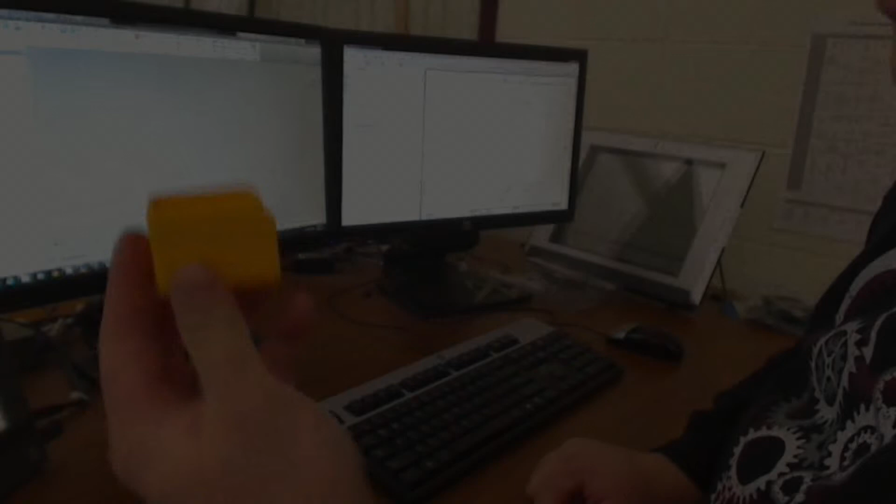The next part is what I'll call the dump bucket, like the back dump truck type bucket. It's going to be a shelled component with walls, and it's got fillets on it. It's got those pegs on the bottom as well.

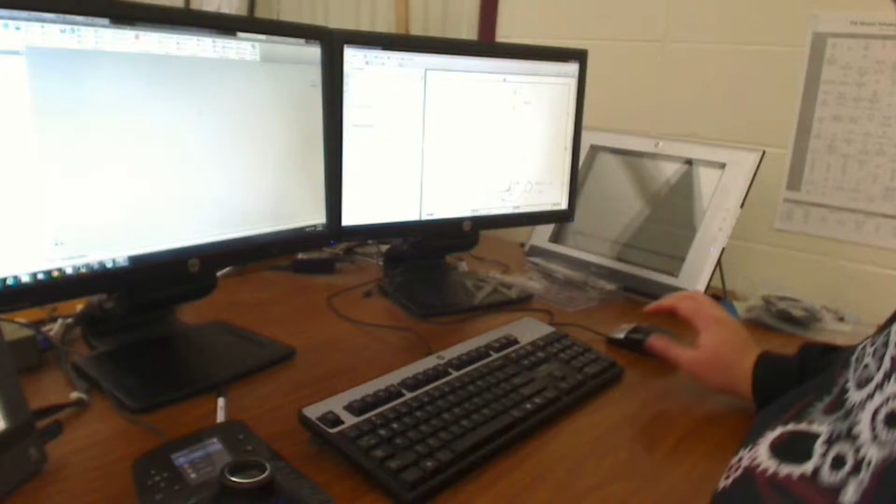So in a new part, I'll start with a block that will represent the basic shape of it. So I'll start creating a 2D sketch. Similar as before, I'm going to constrain it to the center of the line for the origin. So I'll first draw the overall shape, which is 1.84 and 1.63.

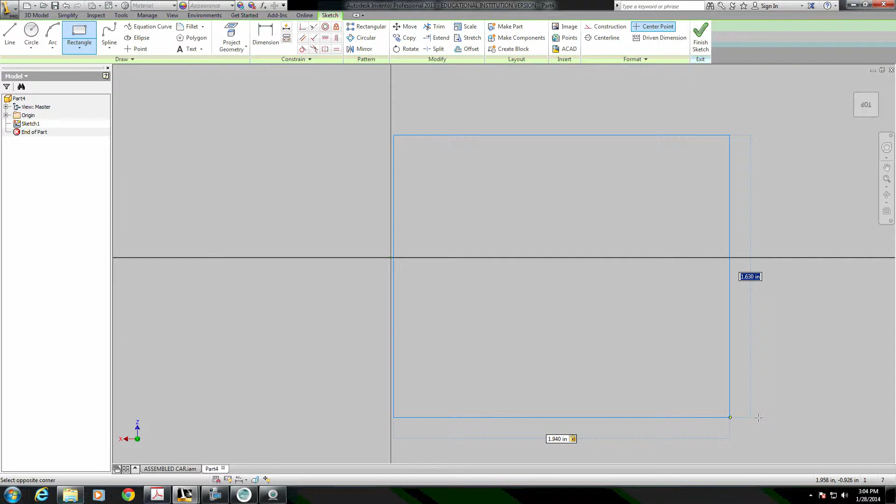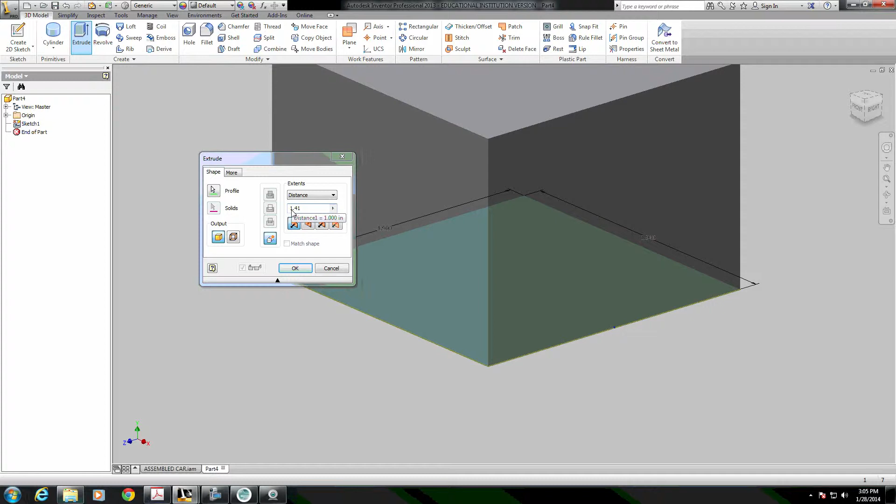I will coincident constrain center line there to the middle, and extrude it up to a height of 1.41. Then I'll add some fillets I need before I use the shell tool.

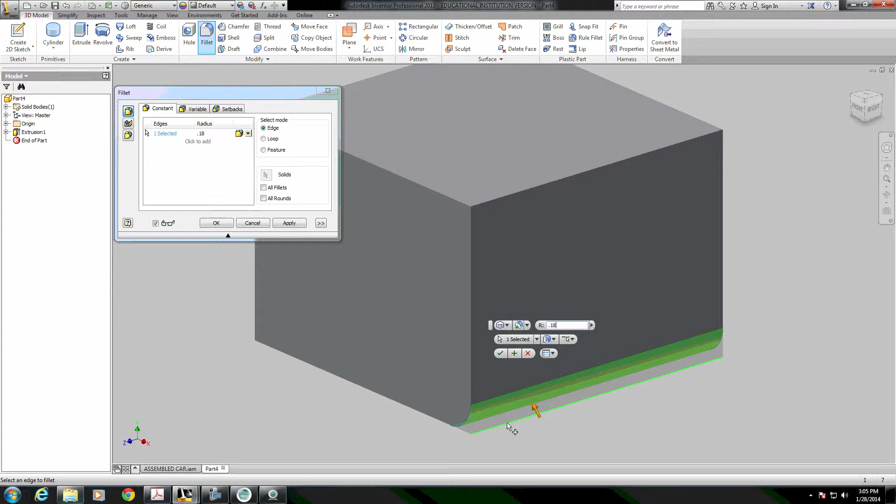A fillet on what is the lower edge of the front of 0.18, and also the sides here and the bottom corners here. Then I'll use the shell tool, removing the top. A thickness of 0.1 in is correct.

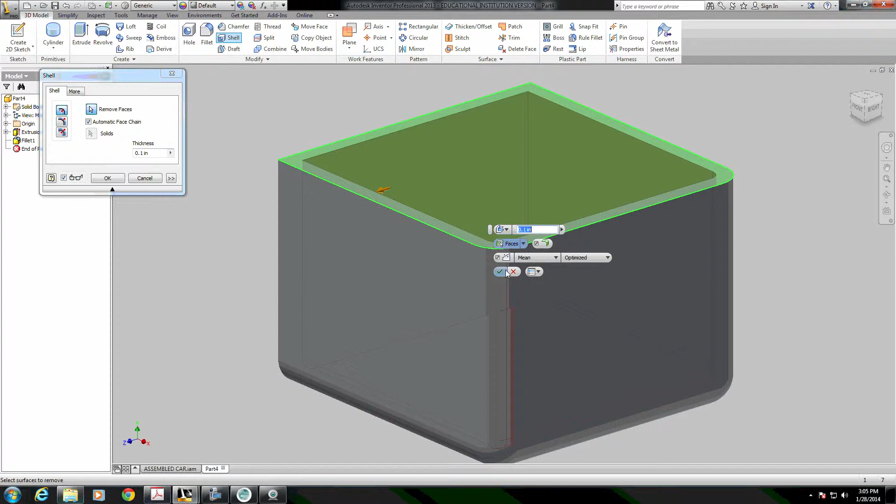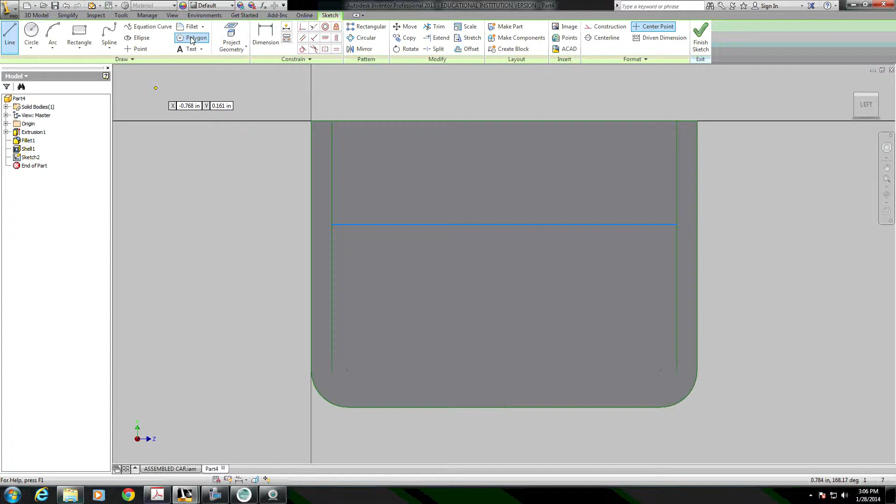Then I have to cut off a portion of the back here. So to do that, I'll create a sketch back here. I'll project the geometry of those inside lines, represent the thickness of the wall. I need just one line across here, which I can dimension as being measured 0.785 from the bottom.

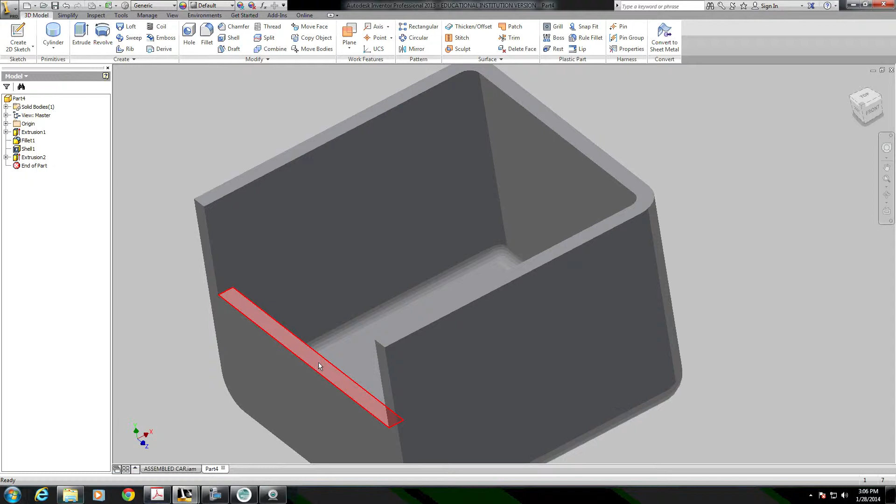And now I can extrude just this section with a cut to the next piece it finds, which is just through the first wall. And I have that cut out. The back edges of the bucket have a round over to them of 0.385, so I'll fillet both of those.

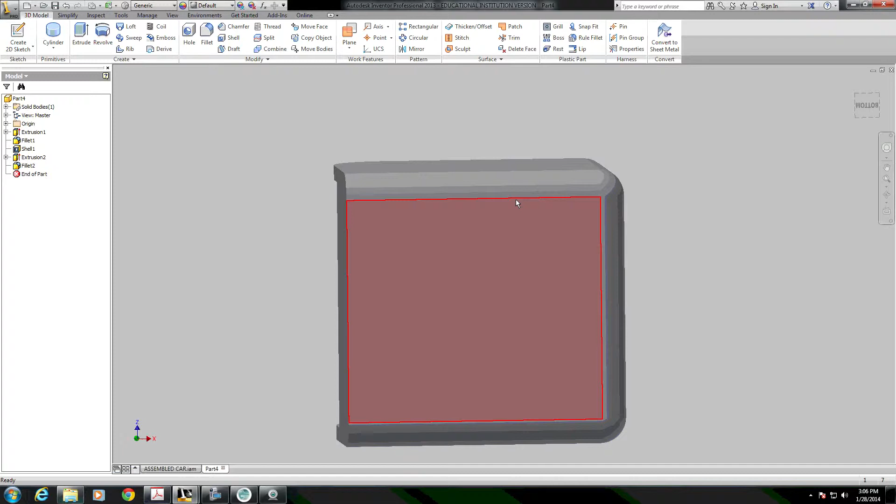Then I need to add the posts on the bottom. So I'll create a new sketch on the bottom. The posts have some detail to them. They are circles, circular pegs with little nubs along the side for the interference press fit to keep it together.

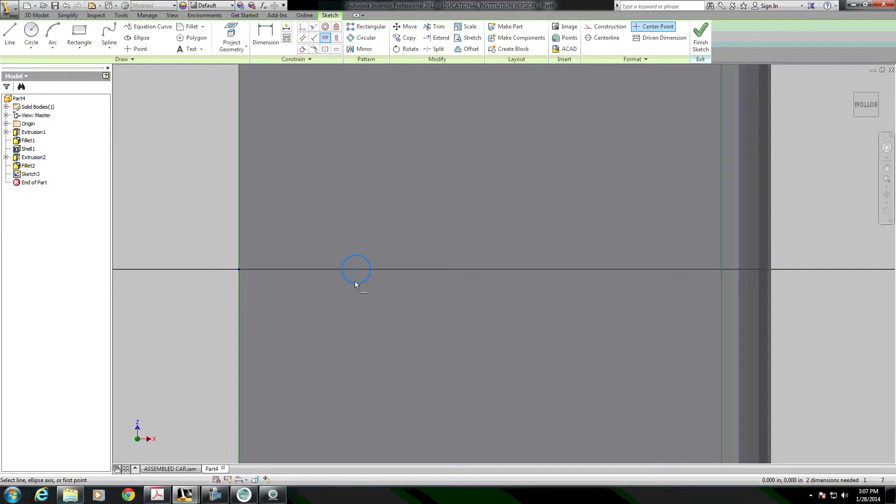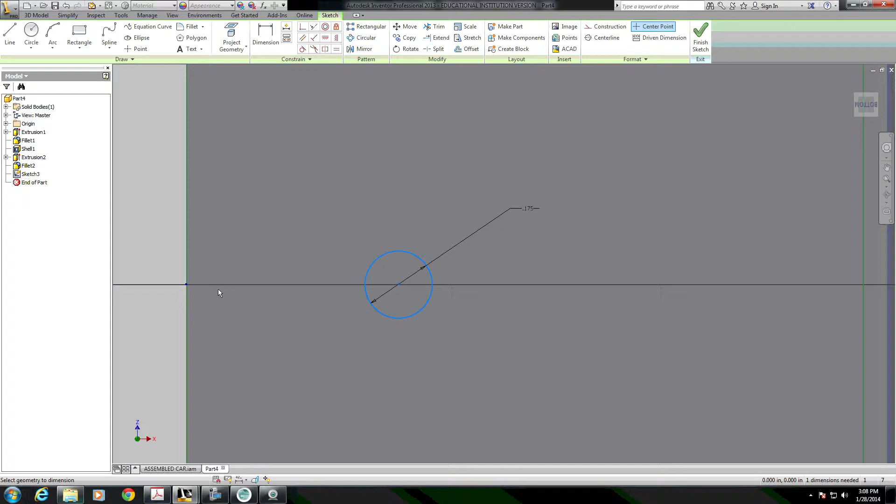So I'll start with a circle, and I'll horizontally constrain it so that it's aligned in the middle. Then I'll dimension that as being 0.175. The distance from the end I measured at being 0.478.

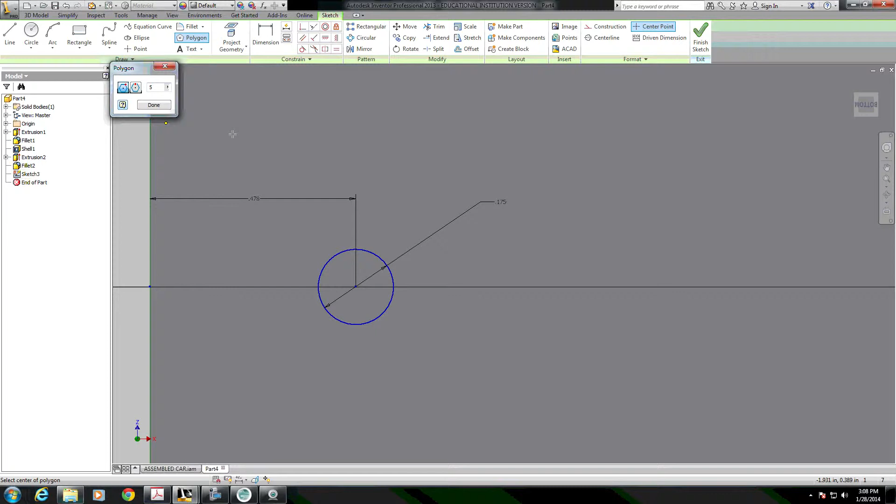And then there are 5 little nubs that stick out around the perimeter of the peg. So I will place those at the points of a pentagon. So I'm going to use the polygon tool. I'm going to do a 5-sided polygon that's inscribed because I want it to touch the edges of the circle. And I want to make it as construction lines. So I'll choose the center of my circle, and then I'll choose the tip here.

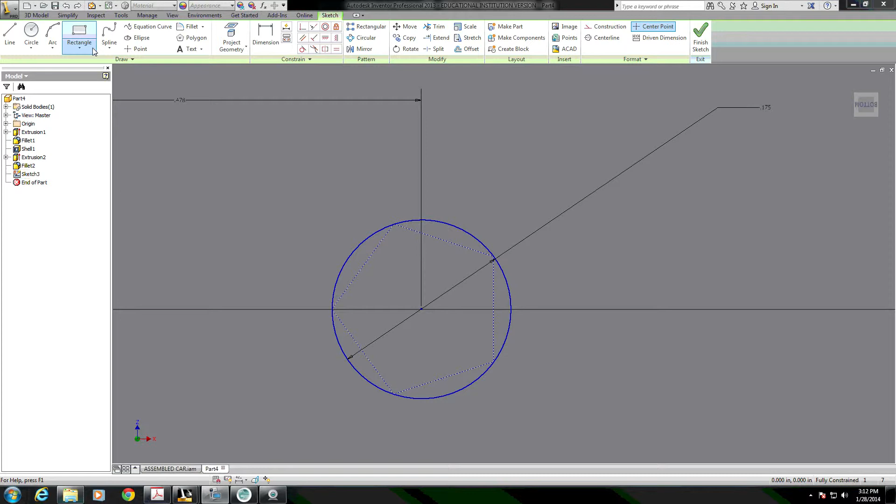I will make sure that stays constrained by using a horizontal constraint on the tip to the origin. I'm going to place circles at 0.03 at each of the vertices.

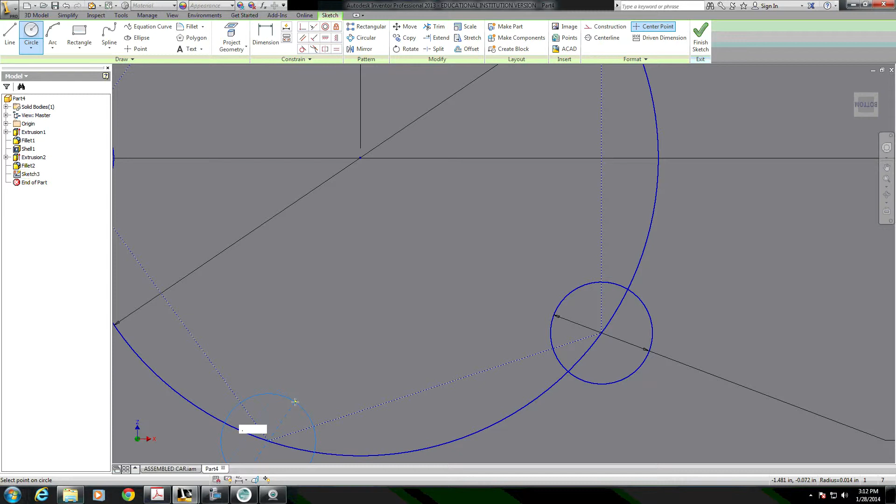Now one last, go back and add sketch. One last thing before I finish the sketch is I'm going to place a point for where the other peg is. However, I'm not going to redo all of the geometry because I don't need to. I'm simply going to use a pattern later on.

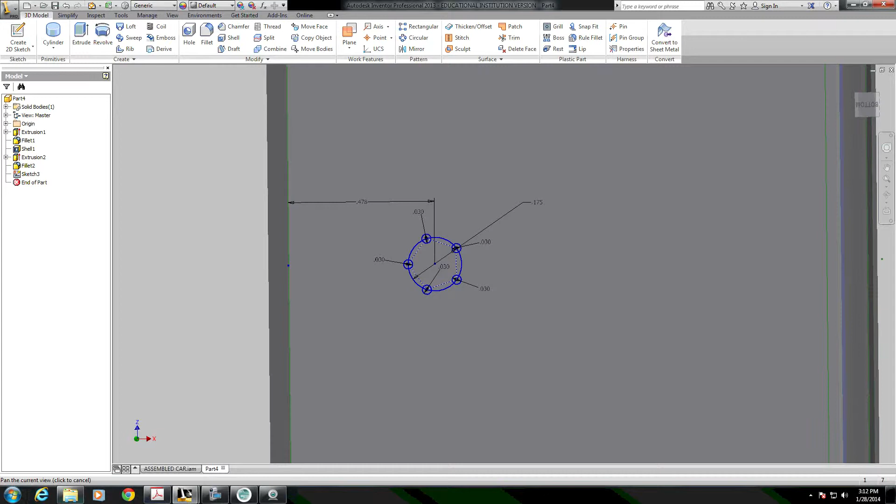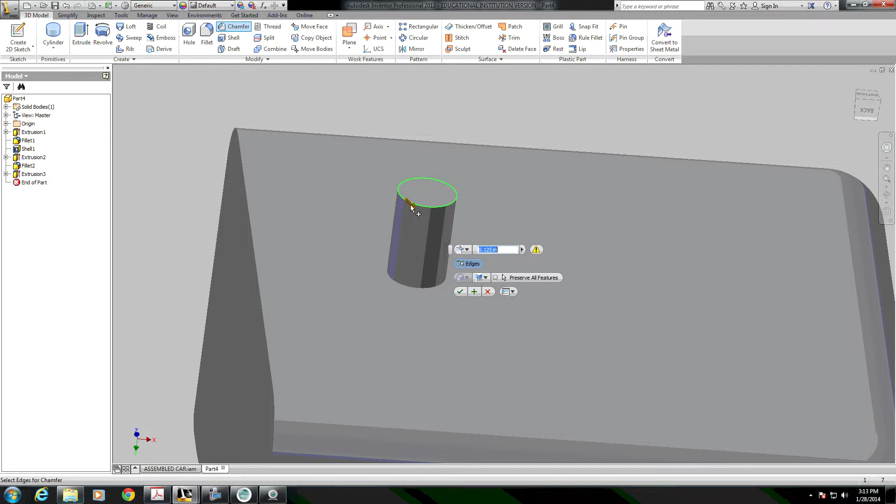Now I'm going to extrude that. I'll have to do it in a couple of different extrusions. So I'll start with an extrusion of just a center point, and that's going to go up a distance of 0.275. There is going to be a chamfer on that edge. I'm going to chamfer that edge at 0.04.

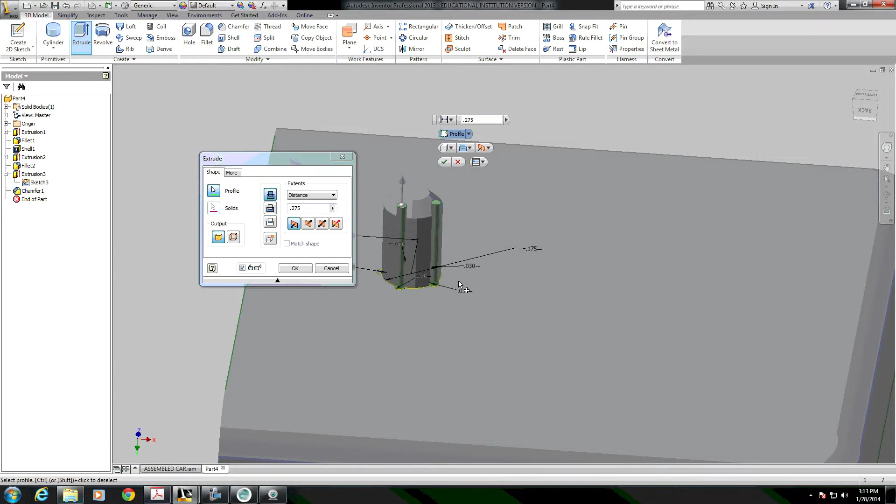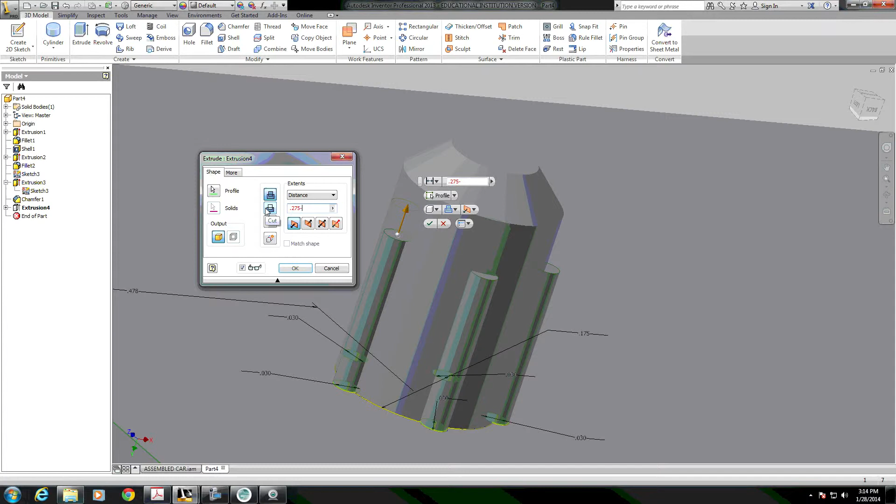And then I'm going to go back to that extrusion, make that sketch visible, and make another extrusion, this time with the nubs for the peg. Select all 5 of those. Those I only want them to go up the height of the non-chamfered part of the peg. And that distance would be the 0.275 minus the chamfer of 0.04. That's my peg. I can hide that sketch.

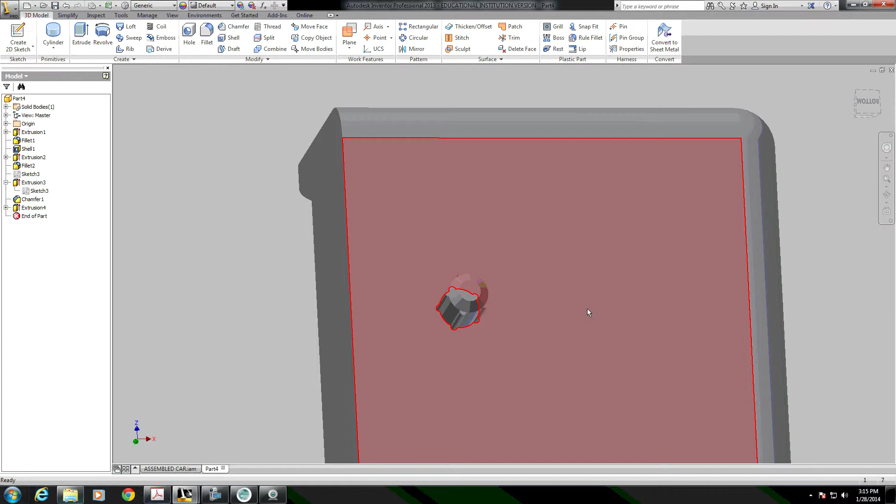Now I need 2 pegs. But instead of remodeling and re-extruding a second one, I can simply use this one and duplicate it. It actually is duplicated in the same orientation, just 1 inch over, because that's how far the holes are apart on the model. So I'll use this rectangular pattern tool for that. I'll choose these features, which is actually 3 features. The first extrusion, chamfer, and the second extrusion.

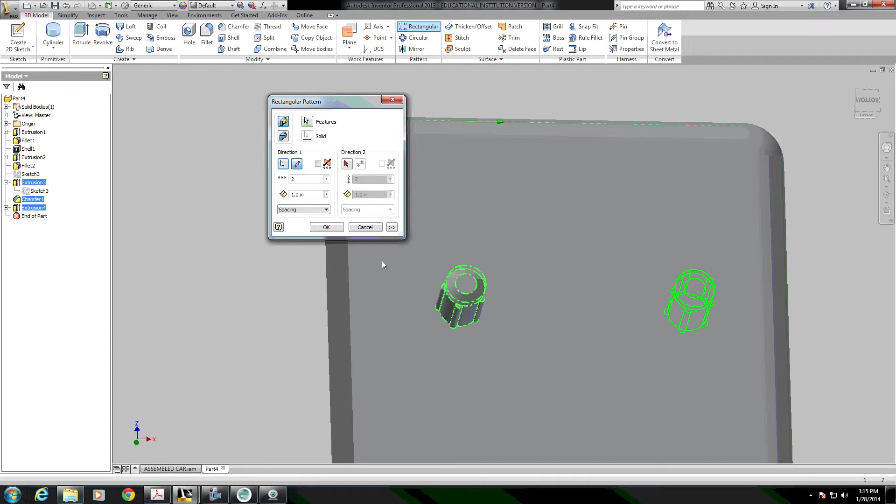The direction, I want to go along the length here, so I'll click just an edge. It's going that way, so I'll flip it to go the other direction. I only want 2 of them 1 inch apart. I press OK. And now I have both of my pegs modeled. The entire part is modeled. To finish it up, I'll choose an appropriate material color. And save it.

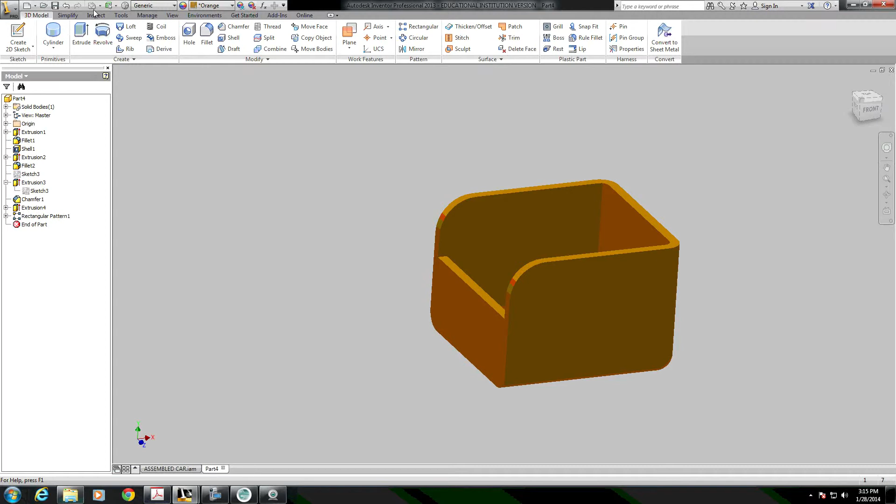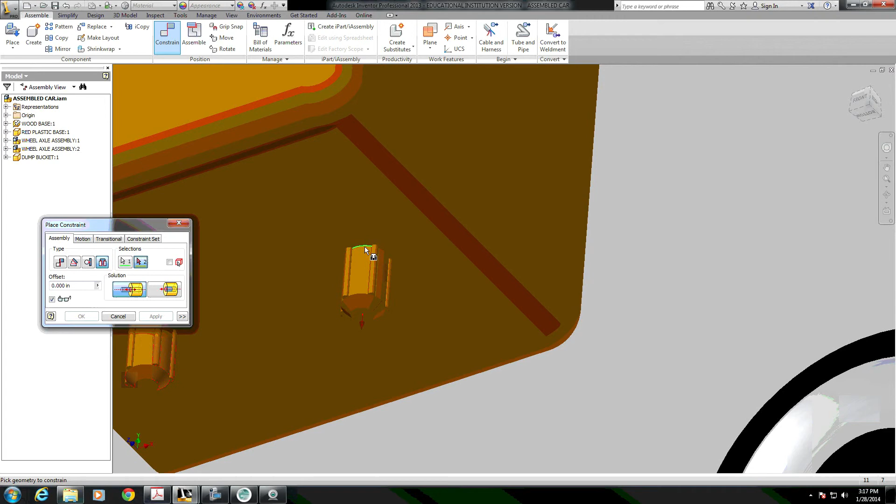And then I can add it into my assembly right away. So I'll place the bucket into my assembly. I can use an insert constraint, choosing a part of the circle where the peg meets the bottom of the bucket, and choosing the hole where it goes. And then to make it a little bit easier to constrain, I'm just going to turn it here so I can see the peg and the hole at the same time. I'll choose the peg at the bottom and the hole. And I've got my bucket attached to my assembly.